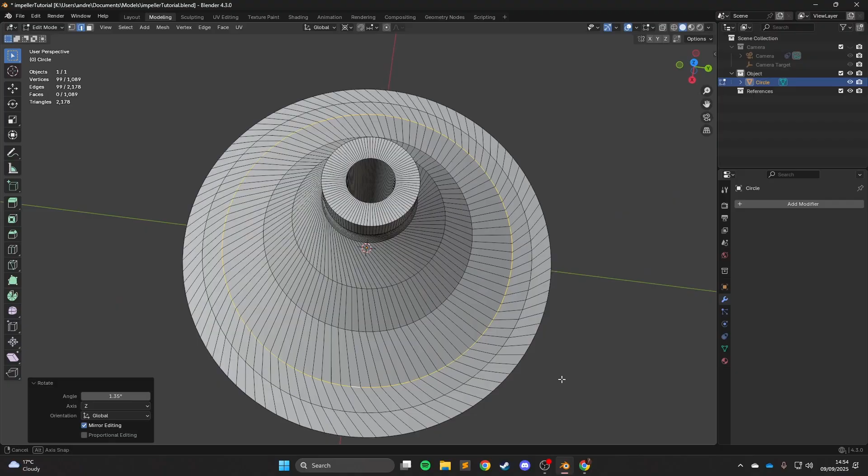So what we're going to do is we're going to take this and just extend it out a little further. And then we can connect this to about there, right? And if you just click one of the edges, hold F like that, it'll just scale around. So we're going to rotate this a little bit just to smooth it out a bit. And there we go. This looks a bit weird, but that's the base geometry. So we're just going to hit shade smooth actually.

Then what we're going to do, we're going to go create a bevel modifier, make it like 0.1 millimeters or something like that. Set the segments to 2. Set the limit method to weight, profile to about 0.7, and then this miter outer to sharp here, right? And the reason we're going to do that is so that we can add an edge weight. So what you do is you select each edge loop that you want to keep sharp, right click, edge bevel weight, press 1 and then left click, and that adds a bevel weight to it.

So that basically tells the bevel modifier which edges we want to keep sharp, and that makes it a lot smoother. And then on top of that we can use subdivision surface, and that again smooths everything out a little bit. So now it's just a case of sort of playing with this geometry to get the exact sort of profile shape you want. There we go. So you can just scale each bit separately, and you can also turn off the modifiers if it makes it easier to see when you're actually modeling inside here.

There we go. So that is the base shape without the blade. So you can imagine that's where the hub is. And we've got that sort of curve going on. As you can see, the grooves here, where the part was machined out of.

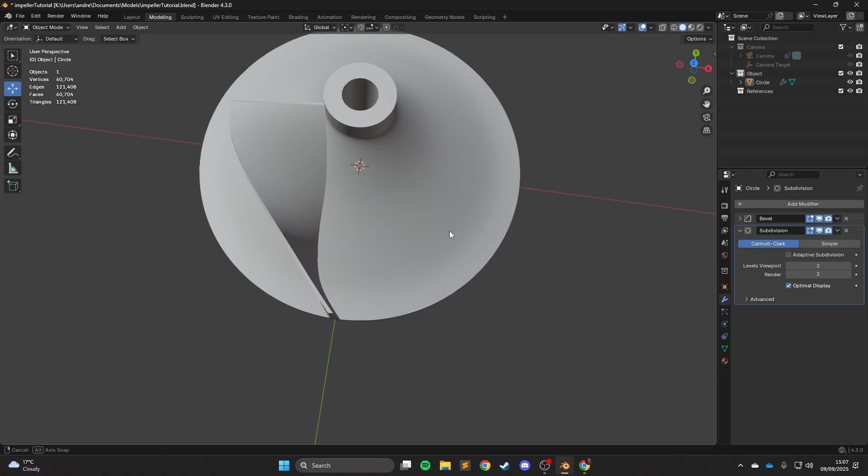What we're going to do now is rotate it all the way around. We want an 11 blade compressor, that's what we set up for. So we'll come out to object mode, add an empty—any kind works, I just use plain axes—and rotate it along the Z axis by some amount.

So what we're going to do is 360 divided by 11, which is 32.7 degrees. That's a long number, but if you type it in specifically, it'll give you pretty much the exact turn rate you want.

We're going to add a modifier to our object here, the impeller—an array modifier. We'll uncheck relative offset, check object offset, and select our empty. Then we'll set the count up to 11.

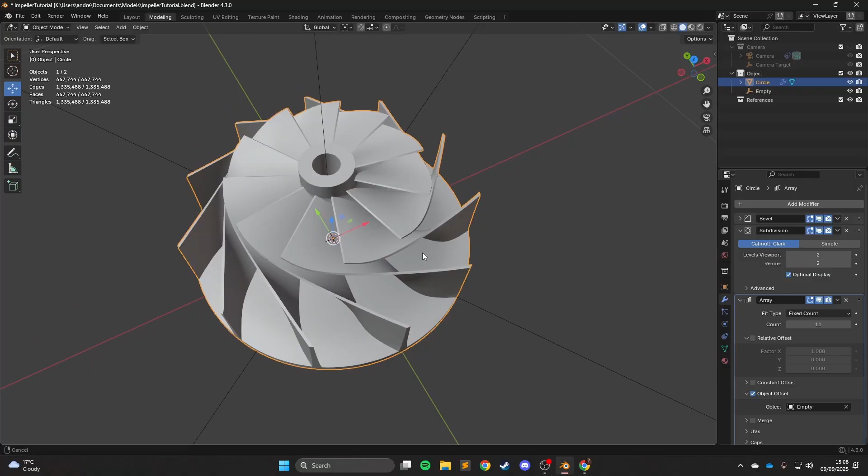This may start to get a bit laggy on lower end systems because of so many vertices here. So we're going to pull this to the front and hide our bevel and subdivision modifiers, and have a look at this.

So we have 1, 2, 3, 4, 5, 6, 7, 8 in between here—8 faces. Once we uncheck array, we're going to have 4 on each side. We'll go 1, 2, 3, 4, select the 5th one, hold Alt, select this, and delete this face. Do the same on the other side.

1, 2, 3, 4, select the 5th, Alt select the 5th one, select that face. Come to this unselected area, hit L, delete faces. Then we're going to add our array modifier back and apply that.

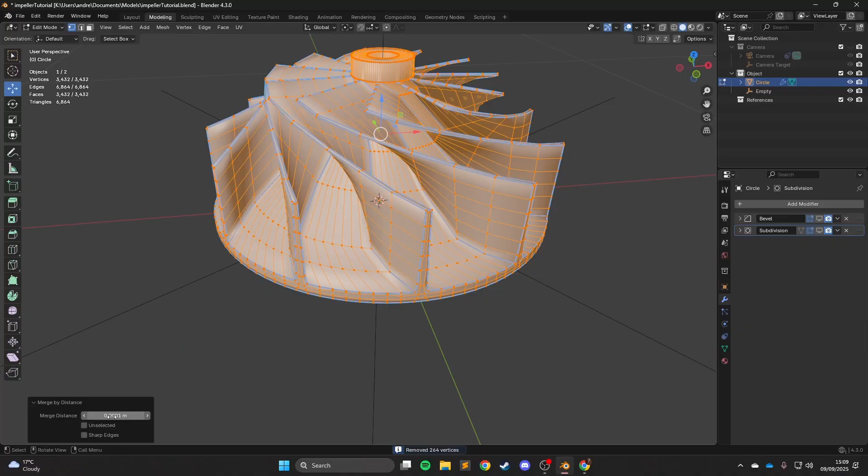We'll come to object mode, go to edit mode, select everything, go to vertex selection, and merge vertices by distance. I'd set this quite low, so if there are any vertices close together but not exactly on top of each other, they won't get merged. Now we can shade smooth, bevel, subdivide, and there we go.

This is our impeller. Now we can go ahead and add materials to it if you want. I've got another video on my channel about machine metal material. You can add a quick anisotropic behaviour here—plug that into there, put that up top of this. I'm just playing with some settings here, you can mess around with this when you want.

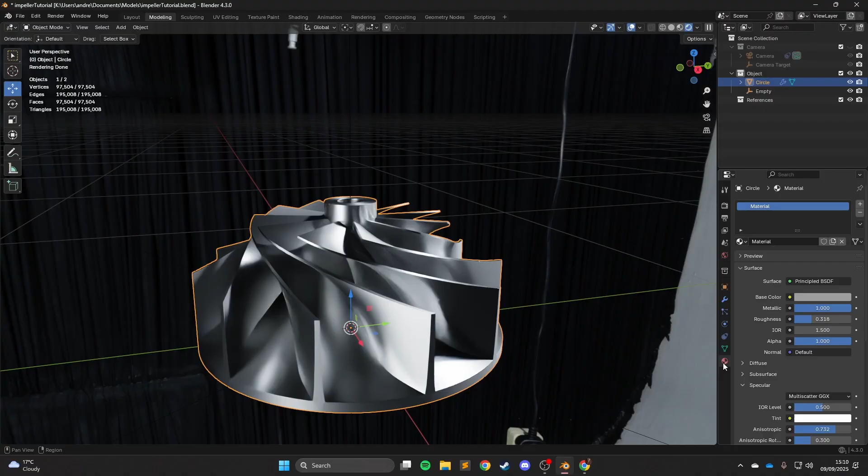If we go into world view, we can add a quick little HDRI, and there we go—that is our impeller.

So now that we've got a model like this in Blender, Blender's really good—it's got a lot of good rendering, animation packages, and tools in general compared to a lot of CAD software. Like a lot of CAD software, you could model something like this, but you wouldn't be able to get some of the details here. See, if we go into our modifiers, you can adjust the bevel here.

If you turn this up to maybe 1mm like that, you can start to see you get that shine on the edges. CAD software is so precise that it just can't do this sort of thing—it can't do that smoothness. You can also add detail individually—hit this, control B to bevel it, and add a bit of curve on the edge, kind of whatever you want.

So this is one of the main reasons I think everyone in engineering should try Blender. It's completely free, so you don't have to pay anything, especially compared to the prices of a lot of CAD software nowadays.